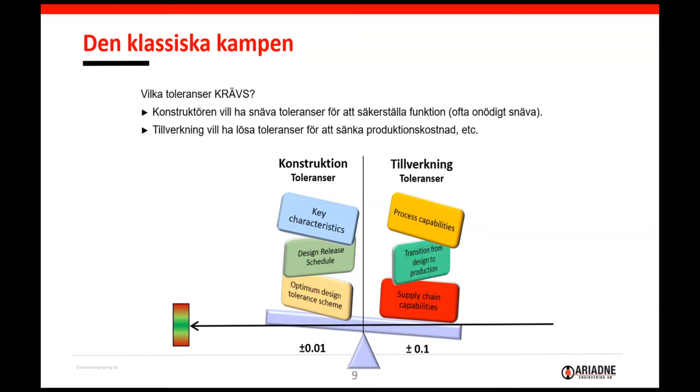Yes, I'll just share my screen. Am I sharing, Patrick? Yes, perfect. Okay, great.

All right, welcome everyone. My name is Felix. I'm an application engineer here at Ariadne Engineering. I'm mostly involved with tolerance analysis. And today I'm going to demonstrate EZ Tolerance Analysis for CETOL, for Creo Parametric, and it's fully integrated in Creo Parametric. And the benefit with this is that we can reuse a lot of the information we already have in the 3D model. For example, assembly constraints or product manufacturing information.

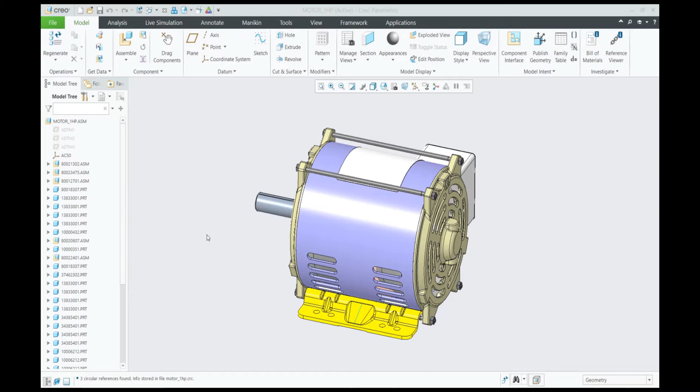So right now I'm showing the product we are working with today, a small electric motor, and I'll just show a section view so we can see what's happening inside. And for the first part, we're going to investigate the gap right here between the bearing and the casing. And you can see there's already a washer inside, but we want to see how much this gap can vary, if it gets bigger or smaller, to just fit an appropriate washer inside.

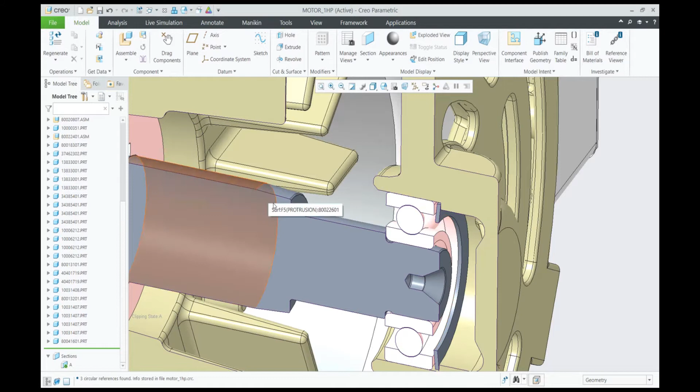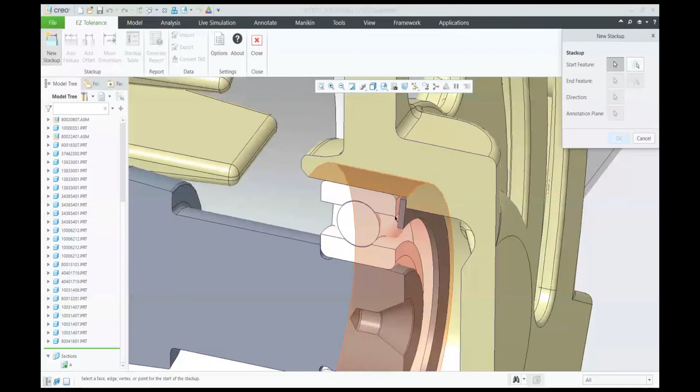So I'm just going to start the application. You can see it here, EZ Tolerance Analysis. And we get a new toolbar. And I'll just get started and define the first stack up or specification. So I just select the surfaces. So one side of the bearing and then the surface on the casing.

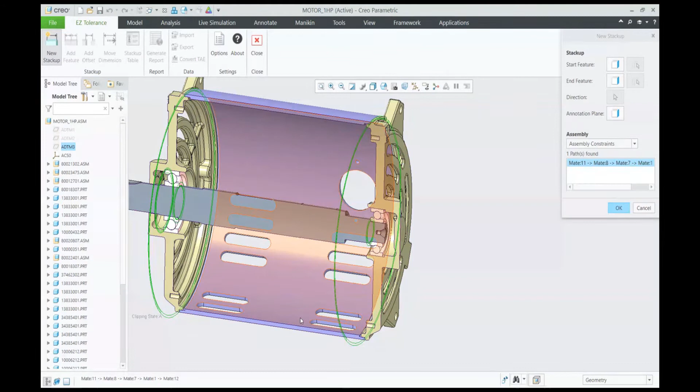Then I'll place my annotation. So that's the nominal gap, 1.92 millimeter. And then EZtol automatically looks at the assembly constraints I have defined in my 3D model and finds the tolerance loop, like here. So it will highlight all the parts which are part of my loop and the contacting surfaces. And if I just click OK, it will display the stack up here on the right-hand side and the nominal dimensions in the graphics interface.

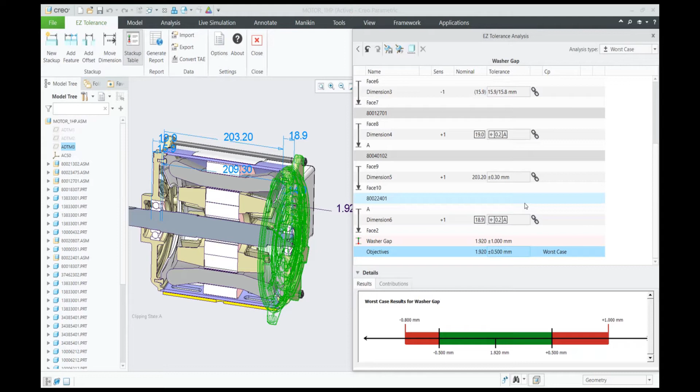Now the only thing left to do is I'll just name my stack up. So this is the washer gap and put in some requirements. So in this case, I want to be within plus minus 0.5 millimeter. And just like that, we've defined our analysis. So that was a really quick and easy process.

And what we get down here, that's our worst case result. So in a worst case scenario, the gap can be up to 1 millimeter larger than nominal or 0.8 millimeters smaller. So that barely took a few minutes. But let's see what else we have here.

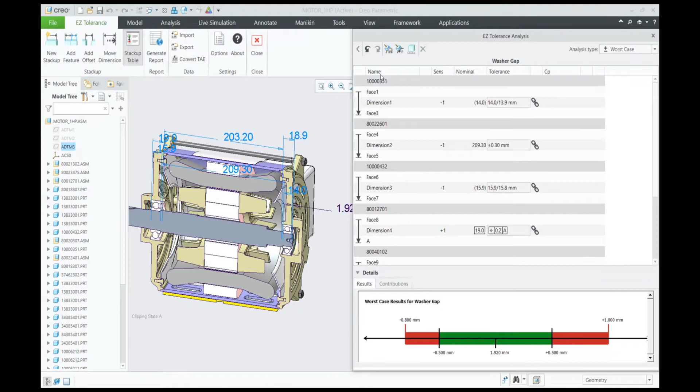Here in the table, we can see all the parts and tolerances which are part of our stack up. So for example, if I hover over the first name right here, which is just the part name, it will highlight the bearing. So that's the first component in the chain. And here's basically the width of the bearing. So from one side to the other.

So the bearing is nominally 14 millimeters thick. And it has a tolerance of a maximum of 14 and a minimum of 13.9 millimeter. And you can see the little chain icon right here, which means this tolerance is imported directly from the 3D model. So if we have that information, we'll just use that for our tolerance analysis.

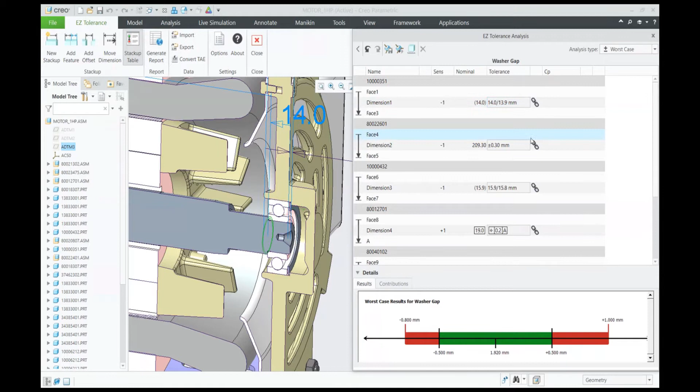And then, for example, you can see here the next part, that's the shaft. And here we have a linear dimension plus minus 0.3 millimeters. And then, for example, here we have a geometric tolerance. So we support all kinds of tolerances. All right, and that brings us to our worst case result at the bottom.

But the great benefit here is we don't only get the worst case result, but we can also look at the statistical result. So I can change the analysis type up here, and depending on your needs, you can quickly switch between worst case, root sum squared, or some statistical metrics. For example, capability, sigma value, percentage of yield, or defects per million opportunities.

I'll now show capability, or CPK, which is a very common metric used in several industries. And it basically says how well you fulfill your requirements for any given specification. So I'll just switch to statistical capability, and we can see the result window down here changes quite a bit. All right, so now instead of just a bar, we get a certain distribution.

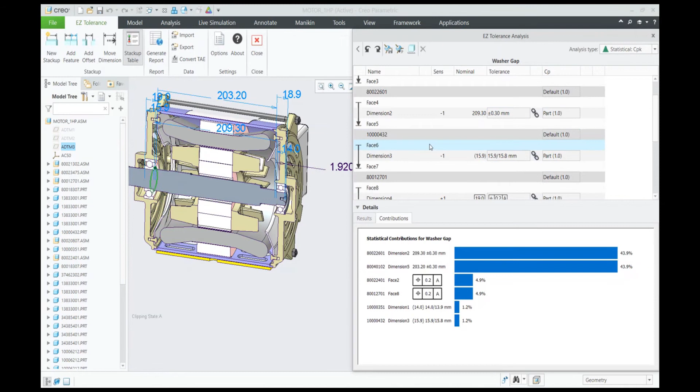So I'll just look for the linear dimension right here, currently set to plus minus 0.3. And I'll change that a little bit to plus minus 0.15. So I'm going to tighten the tolerance a little bit. And you can see the contribution has gotten a lot lower.

And the great benefit here is that this tolerance is directly linked to our 3D model. So every change I make will also be changed in the 3D annotation. So after I've done tightening or loosening all the tolerances, I don't need to go back and do the same in the 3D model. So that saves me a lot of work. So I'll just find the other one right here, and I'll also set that to plus minus 0.15.

All right, let's have another look at the result. Very good. You can see we are much better now. So we've reached a target quality of 1.51, which is above the one I wanted, which was 1.33. So in this case, we might actually be able to loosen some other tolerances to decrease manufacturing cost. And again, in this case, I want to loosen the ones which are at the very bottom.

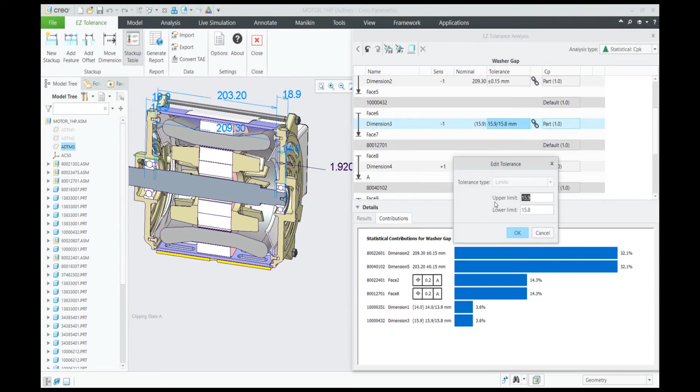All right, for example, this bearing. Currently, we have an upper limit of 15.9, a lower limit of 15.8. Let's see what happens if I change that to 15.75. All right, see, it's gotten a little bit worse, but still above our target.

So this is an easy way to just have a look what happens if I change tolerances. Can I loosen them somewhere to decrease manufacturing costs, or do I need to tighten them somewhere? And I get immediate feedback on how that affects our specification.

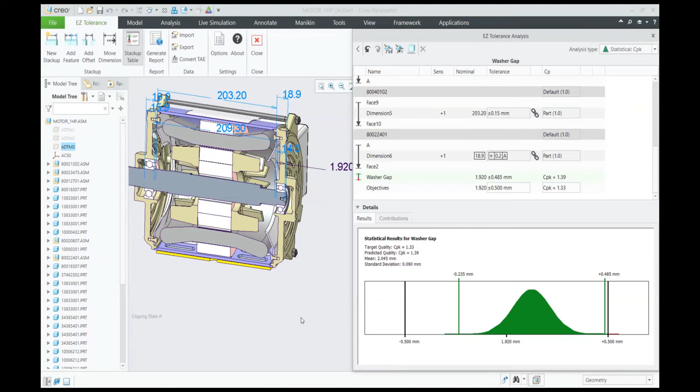Of course, you often don't only have one specification for any given product, but multiple. So I'll just add another one to our model. So I just define a new stack up. And in this case, I want to investigate the gap between the rotor and the stator up here.

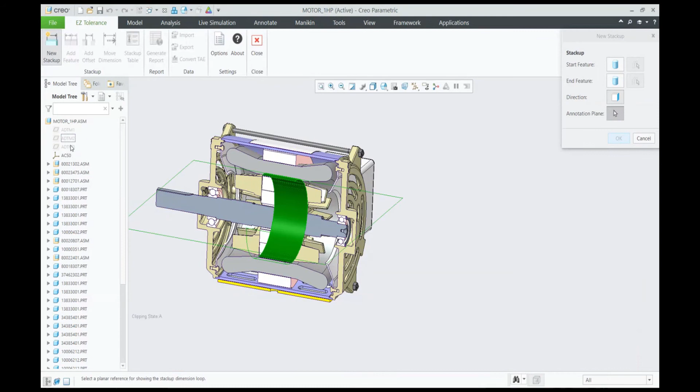Again, I'll just place my annotation. And you can see in this case, due to how the assembly constraints work out, it cannot find a path through the model to create my tolerance loop. So I have to define that manually. But again, this is a very simple and intuitive process.

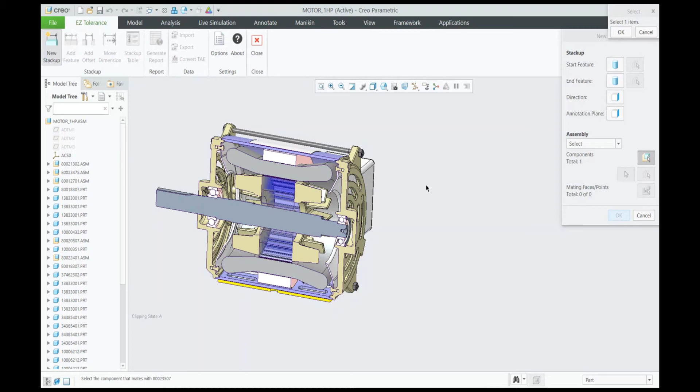The first thing we do is just define all the parts which are part of my stack-up. You can see the rotor is already transparent, so that's the first part in the chain. The next part would be the shaft, the bearing, the casing, the shell, and then the stator.

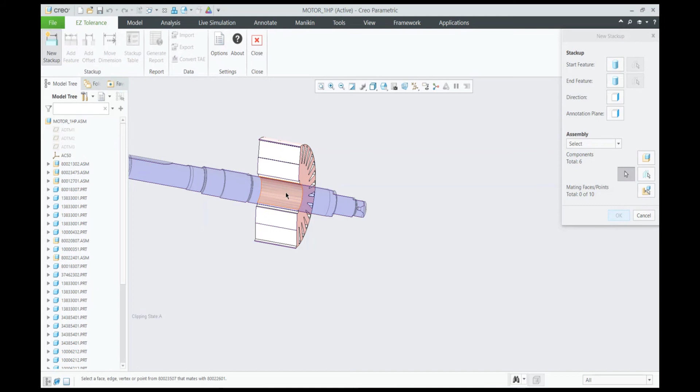Next step is to define the mechanical interfaces. So how do parts connect? So the rotor connects to the shaft here, and shaft to bearing right here. And you can see this is super intuitive and really fast. Just build up the tolerance loop.

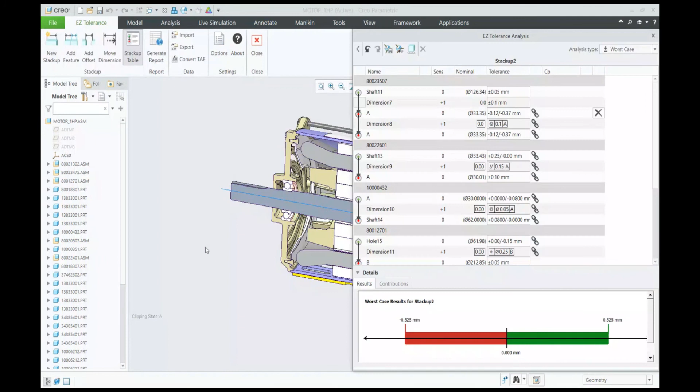And just like that, we've defined our stack-up. Again, it will display all the nominal dimensions in the graphical interface. And you can see here, we're currently looking at the axis alignment, but I wanted to have a look at the gap. So I'll just change our attachment. And now you can see up here between the rotor and stator, we have a nominal gap of 0.33 millimeters. And then I'll just name that rotor stator gap.

All right, again, we are importing a lot of the tolerances, except for up here, you can see we're actually missing some. So for example, right here, the outer diameter of the shaft, instead of having a symmetric tolerance, we can just change that, for example, to a plus minus. We like that, plus 0 and minus 0.05, so I'll maintain the gap.

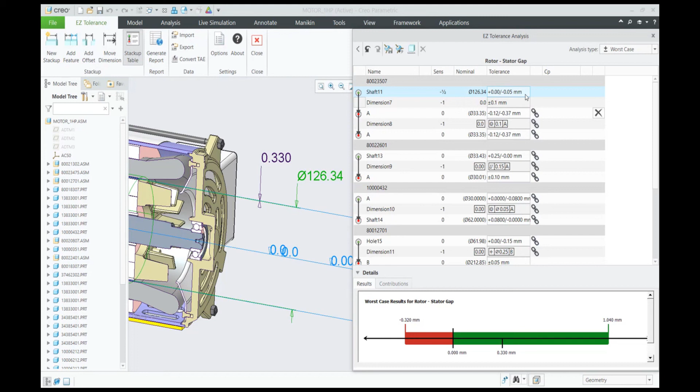And you can see, even if we don't import the tolerances, we can add them manually within EZTol. So again, you've got the choice. If you have 3D tolerances, that's great. We'll reuse them. If not, that's no problem. We'll just add tolerances to our model manually within EZTol. And that's a super quick and easy process as well.

So for example, here we can add a geometric tolerance, position, runout, coaxiality in this case might be appropriate. Tolerance value 0.1. Do I want a material modifier? What's the datum? Again, do I want a material modifier on the datum? And just like that, we've added a coaxiality tolerance. So we support size dimensions, geometric tolerances, linear dimensions, everything you need for your one-dimensional analysis.

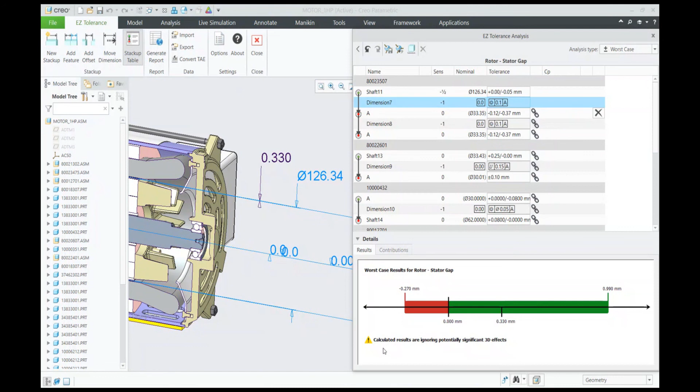And then again, down here, we get the result. You can see in our case, right now, we get another message down here. And it says, calculated results are ignoring potentially significant 3D effects. What does that mean? It basically means that our analysis might not be fully one-dimensional. So we might have 2D or 3D effects, which could affect our result.

And this is a note for you to kind of have another look. Are there any 2D or 3D effects I need to consider? And maybe do I need to do a full 2D or 3D analysis? Maybe do I need to use another tool? Just that you have that on your mind.

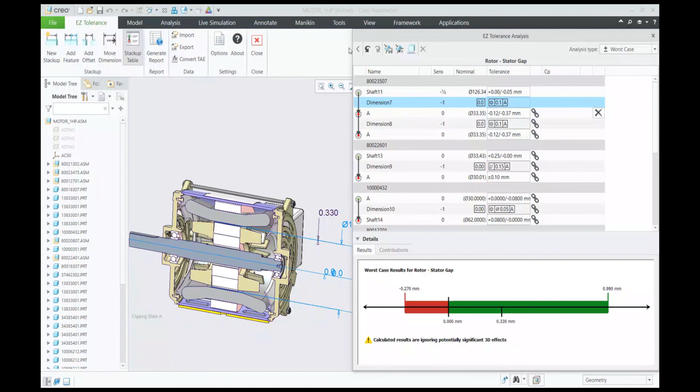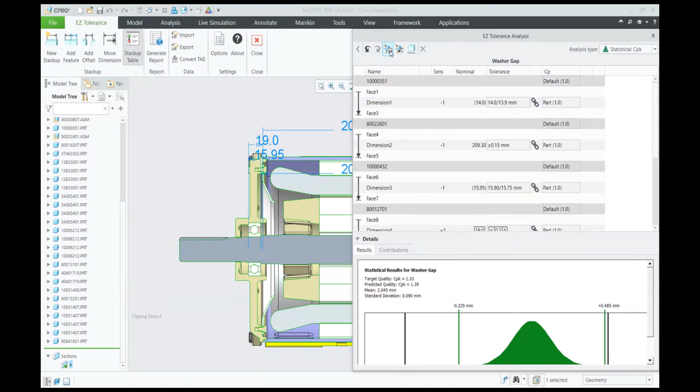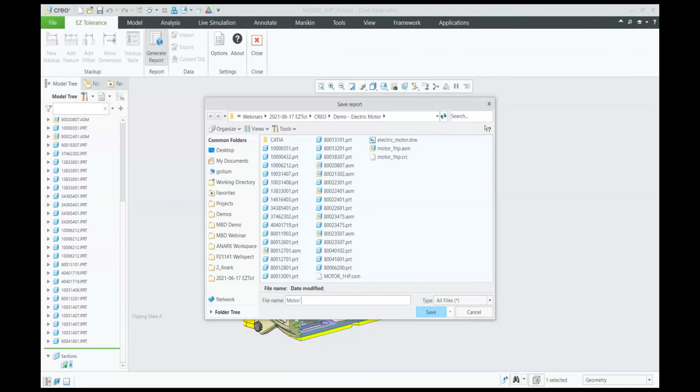All right, if I defined all my necessary specifications, I might want to share what I've discovered or what I've done with some of my colleagues. So in this case, we can generate a report with EZTol. I'll just take a few screenshots for the report of each individual stack-up I created, and then maybe one for the title page. And then I just click on Generate Report, give it a name, report, and I'll save it as an HTML file, which you can share with your colleagues.

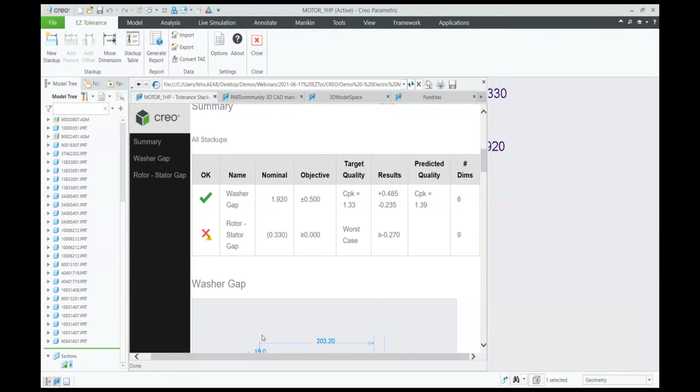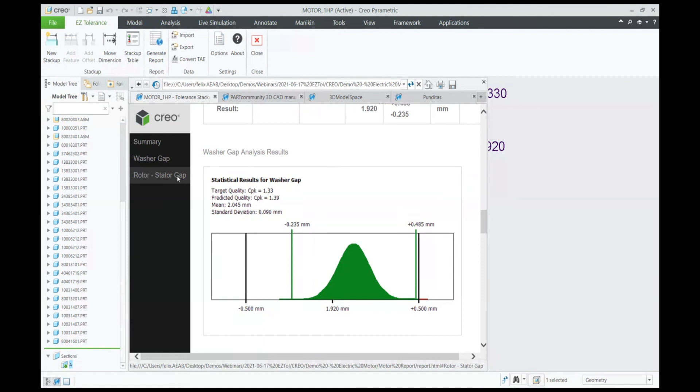This is how it looks. You can see our specifications in the main tab, a summary of all the specifications we created, the washer gap, the rotor stator gap, and then of course for each specification right here, all the tolerances in the loop and the result we wanted to show. And the same for the stator gap. And of course, you also get a list of the contributors. So this is a very fast and easy way to share your analysis with your colleagues.

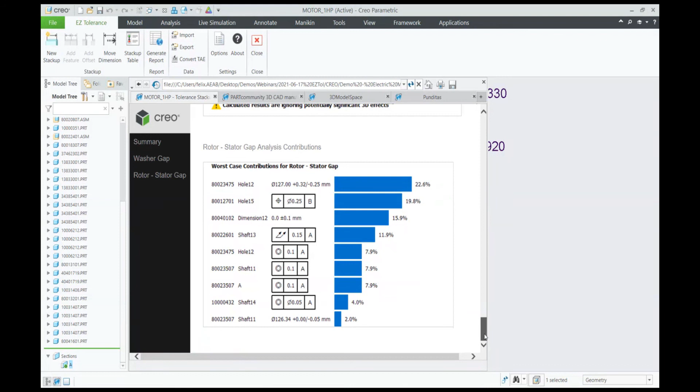And after you're done, you'll just save your model. So just save your Creo assembly, and all our EZTol information will be stored within the assembly file. So you don't need to have an extra file you need to access every time. No, you have all the information right there within the model.

And every time I do some design changes to any of the parts, maybe I make the shaft a bit longer, or I increase the diameter of the rotor, then if I activate my application again, all those changes will automatically be within the analysis. So I don't need to update any spreadsheets. No, I just start the application, everything will be updated automatically.

So this was a very small, very short introduction into EZ Tolerance Analysis for Creo Parametric.